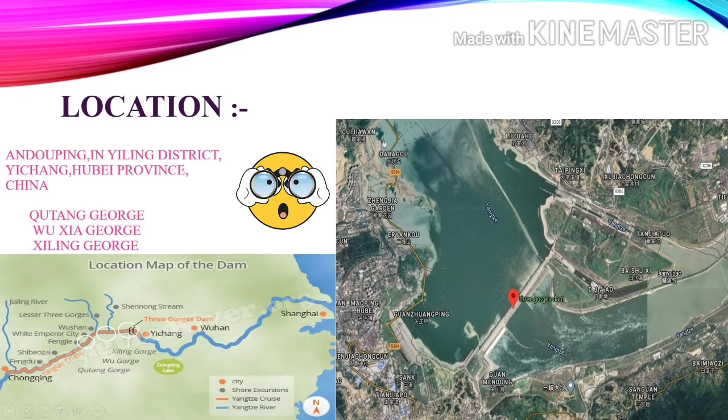It will give you a clear idea, and there is Shanghai city nearby, along with Wuhan, Yichang and other cities. A satellite map is also provided alongside.

So what is the duration of this project, meaning how long did it take to construct this massive work? It was started in 1993 and the construction work was going on till 2009.

It was constructed in 3 phases, as you can see in the table. In 1993 the preparatory phase was there, then phase 1 started in 1994 where earth moving began, and in 1997 phase 1 was completed after the closure and diversion of the Yangtze River.

Phase 2 started in 1998, when a temporary ship lock was put into operation, and in 2003 the reservoir was filled up to a height of 135 meters, and then phase 3 started. The double-lane ship lock was put into operation, and finally in 2009 they completed this massive project.

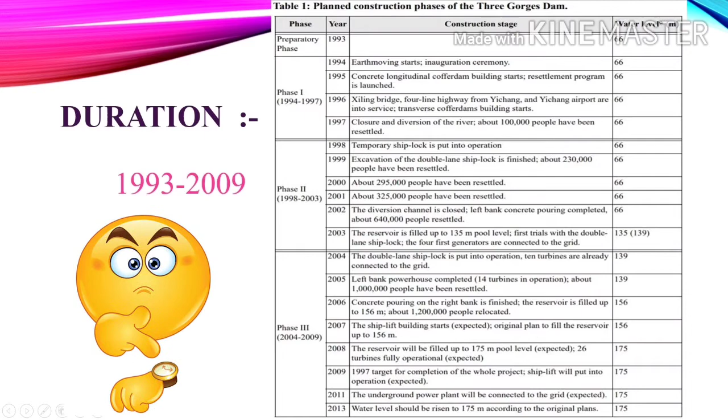So how much money did it take for this massive project? The height of this project is 181 meters upside, so you can imagine the hugeness of this dam, and it stores a lot of backwater. You can see that in the location map.

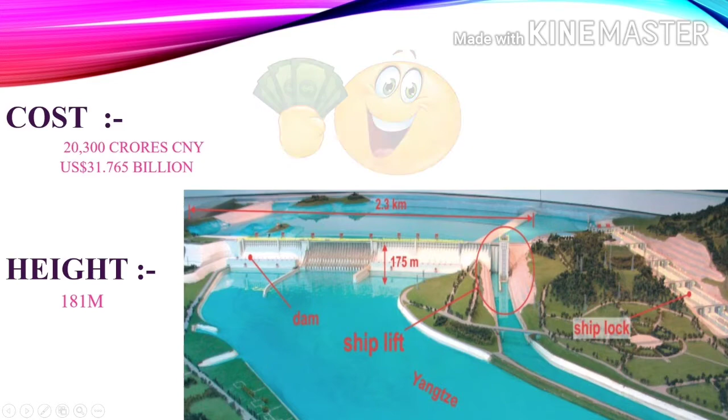How much money did it take? About 20,300 crore Chinese yuan were used to build this dam, which in US dollars is 31.765 billion US dollars.

Next we will discuss its peculiarity. The Three Gorges Dam is a straight-crested concrete gravity structure, 2,335 meters, that is 7,660 feet long, with a maximum height of 185 meters, that is 607 feet. It incorporated 28 million cubic meters, that is 37 million cubic yards of concrete, and 4,63,000 metric tons of steel into its design.

The ship lift is part of this dam. The first part is entering the lift, which we can see in this picture. The vessel enters the ship chamber, which accommodates a draft or depth of almost 9 feet and a height of 60 feet. The chamber can handle a boat that displaces a maximum of 3,000 metric tons of water, or 7,93,000 gallons.

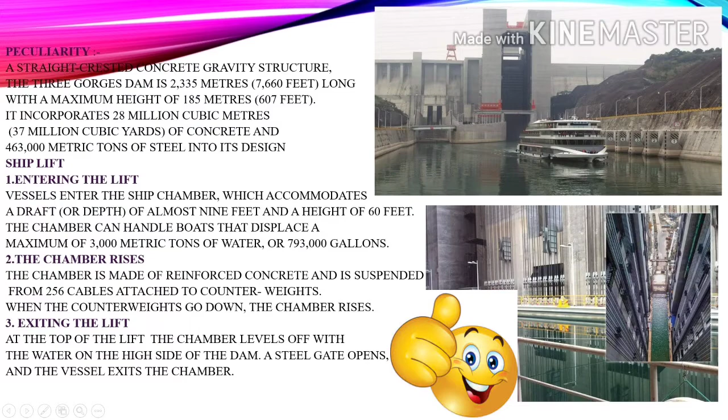The second part is the chamber rising. The chamber is made of reinforced concrete and is suspended from 256 cables attached to counterweights. When the counterweights go down, the chamber rises. The third part is exiting the lift: at the top, the lift chamber level equals the water on the high side of the dam, the steel gate opens and the vessel exits the chamber, as we can see in this picture.

Next we discuss the problems created due to the massive construction of this dam, point-wise. First is more sedimentation in the upper river bed and the Three Gorges reservoir. Second is threat to the downstream river bank and the Yangtze River delta. Third is that many aquatic creatures are endangered.

Fourth, increase in geological disasters. 5, climatic change of the Yangtze River basin. 6, lots of cultural relics and historical sites were submerged. 7, the spread of schistosomiasis westward. And 8 is large human migration of over 1.2 million.

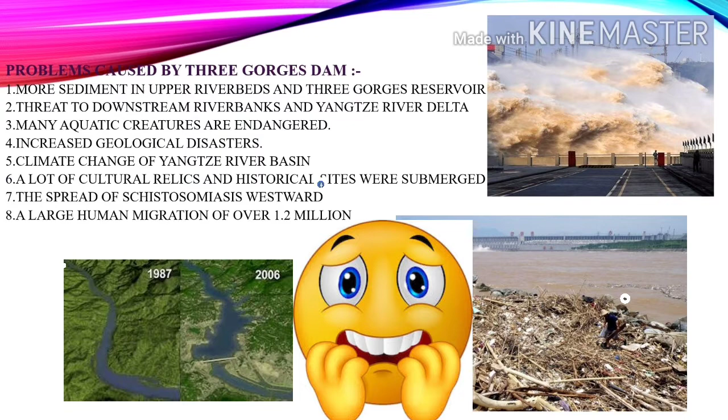We can see in this picture, I am explaining about the size of the Three Gorges Dam. The height of the Three Gorges Dam is about 594 feet, in meters we can say 181 meters, and the length is about 7,770 feet. The dam creates the Three Gorges Reservoir, which has a surface area of about 400 square miles. It means that it is spread over 1045 square kilometers and extends upstream from the dam about 370 miles.

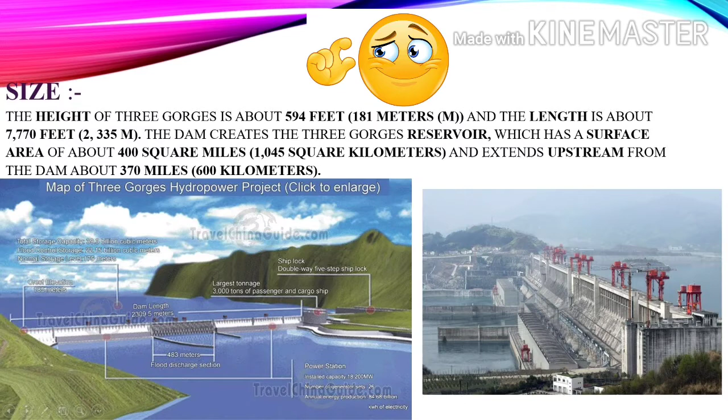Then next we have to go to the power generation capacity of the Three Gorges Dam. The installed capacity of the Three Gorges Dam is 22,500 megawatts. The Three Gorges Dam is the world's largest capacity hydroelectric power station with 34 generators: 32 main generators, each with a capacity of 700 megawatts, and 2 plant power generators, each with a capacity of 50 megawatts, making a total capacity of 22,500 megawatts. Annual electricity generation in 2015 was 87 terawatt hours, which is 20 times more than the Hoover Dam.

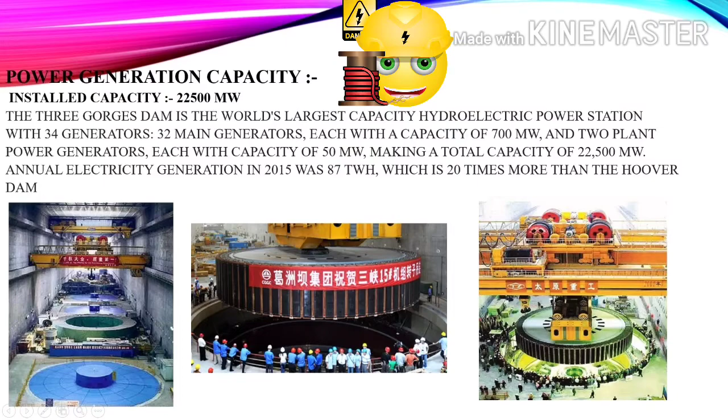Till now, you have come to know that the Three Gorges Dam is the largest dam on the earth, and for this massive construction work, the equipment that was used was also in that proportion. So we will discuss the equipment that was used for this construction. So hydraulic metal structures and construction machinery that includes CNC milling and flame cutting machines and powerful bore honing machines.

Most of the equipment was developed by the company named PowerChina, and they designed and manufactured thousands of tons of metal components and more than 3,000 pieces of equipment for water conservancy and hydropower projects, including large size hydraulic gates, bridges, ship lifts and cableways. The 12 spillway gates and 24 ogee gates on the permanent ship locks for the Three Gorges project are recognized as the highest level of ship lock steel structures in China.

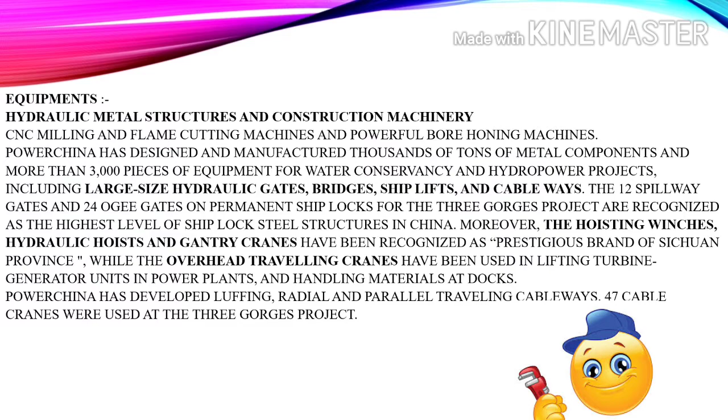Moreover, the hoisting winches, hydraulic hoists and the gantry cranes have been recognized as the prestigious brand of Sichuan province, while the overhead traveling cranes have been used in lifting turbine generator units in power plants and handling materials at the docks. PowerChina has developed luffing, radial and parallel traveling cableways. 47 cable cranes were used at the Three Gorges project.

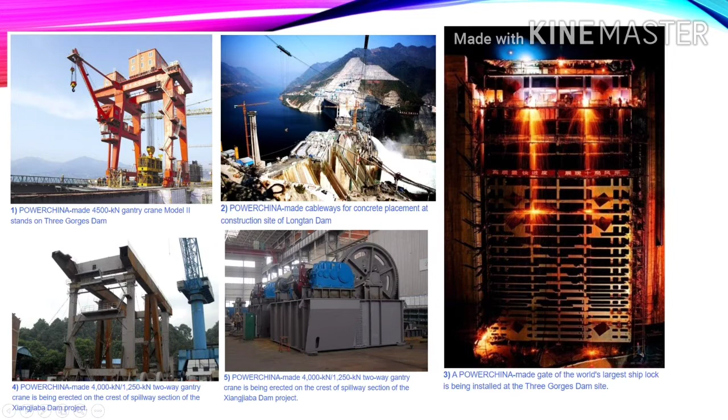So you can see here in the images, the first image is of a gantry crane model that is still standing on the Three Gorges Dam. And the second image is cableways for concrete placement at the construction site. And the third and most important image is the gate of the world's largest ship lock that was installed at the Three Gorges Dam site. Then the fourth image is about the gantry crane model. And the fifth image is a two-way gantry crane, and it was being erected on the crest of the spillway section.

Then another type of equipment that was used in the construction was for power generation. So boiler feed water pumps were used for power generation. Valves, fans, coal mills were also used. Then port and material conveying equipment, that includes stackers, reclaimers, ship loaders and unloaders, tipper systems, and finally the transmission and distribution equipment for power grids. That includes fittings and accessories, jumper spacers, double vertical suspension strings for single bundle conductors, iron towers, switchgears and controls, transformers, concrete electric poles.